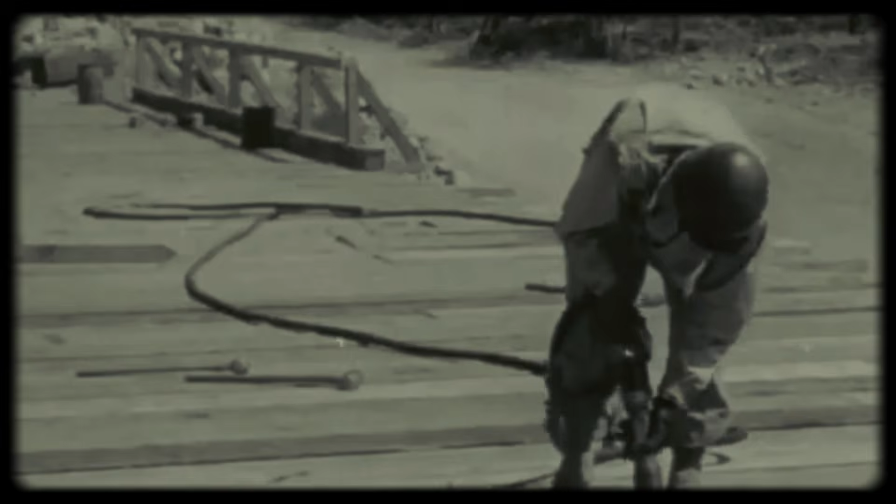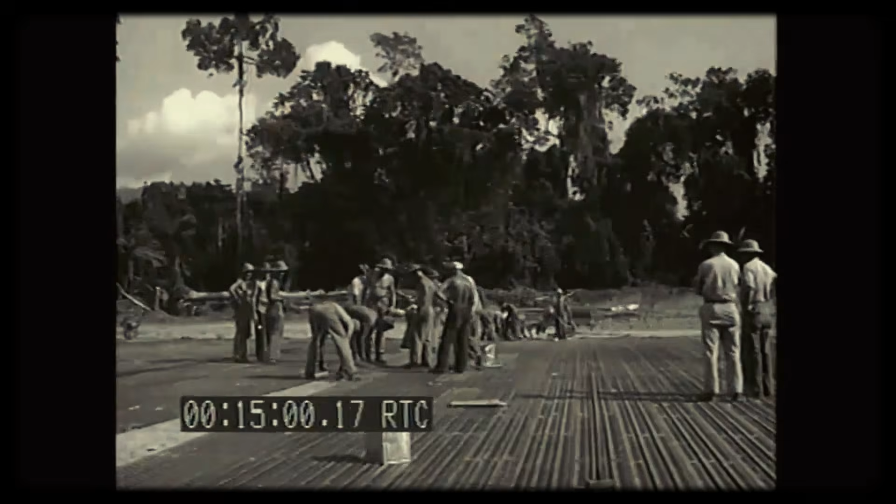Pacific Theater, 1944. American forces need airfields fast. Engineers are racing to build runways on islands that didn't have roads 6 months ago. Coral, volcanic rock, mud. Brutal conditions. The problem isn't just the terrain, it's time. Japanese forces can see what you're building. Every day an airstrip stays unfinished is another day bombers can't launch, fighters can't refuel, transport planes can't land.

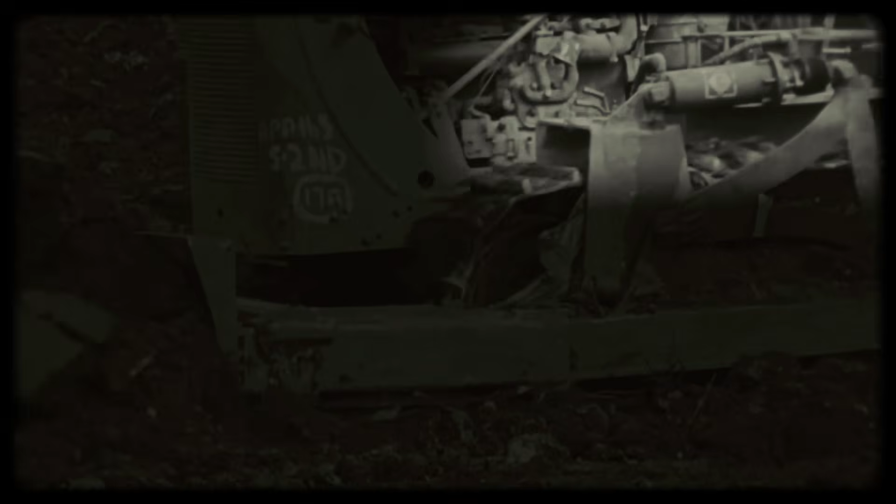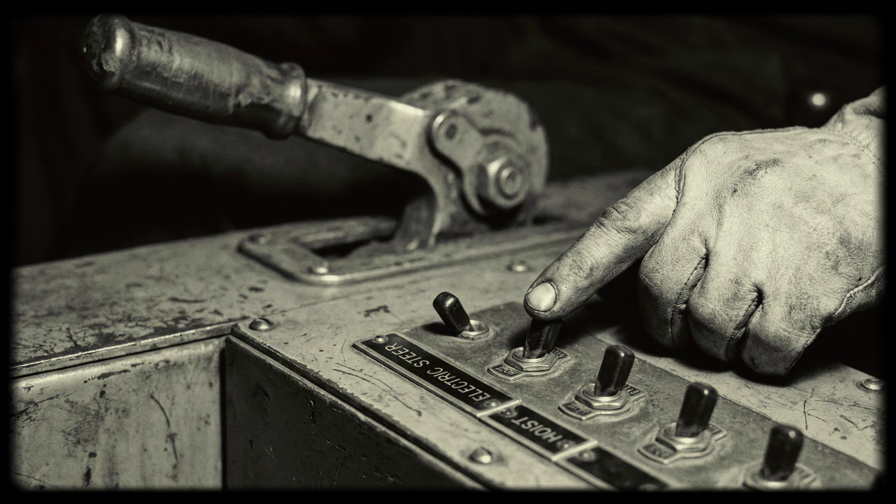Traditional earth-moving equipment is slow. Scrapers require constant gear shifting. Clutches burn out. Drive shafts snap. Operators need physical strength just to wrestle the heavy control levers. And then LeTourneau's machines arrive. Electric controls. No clutches, no transmissions, just fingertip switches that move 20 tons of steel and dirt like it's nothing. The Seabees and Army engineers watch these machines work and realize something: this changes everything.

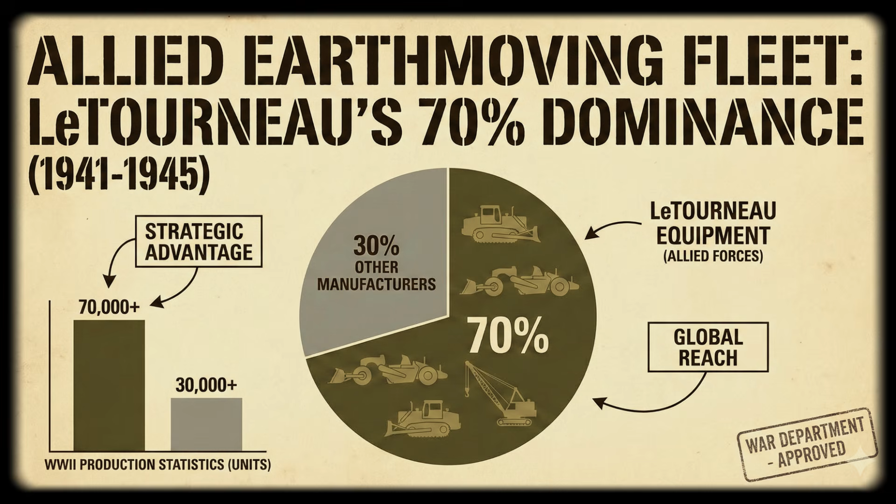Back in the States, construction industry engineers are still calling electric systems too delicate for real work, too complex, too vulnerable to the mud and vibration of earth moving. But in the Pacific, LeTourneau's equipment is building airstrips faster than anyone thought possible. And by the time the war ends, LeTourneau factories have supplied nearly 70% of the heavy earth-moving equipment the Allied forces used. The industry that said electric would never work in dirt just watched it win a war.

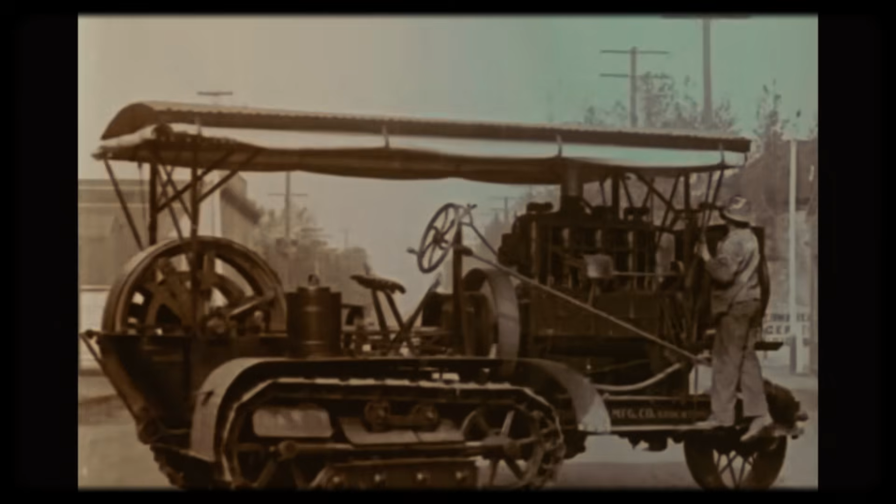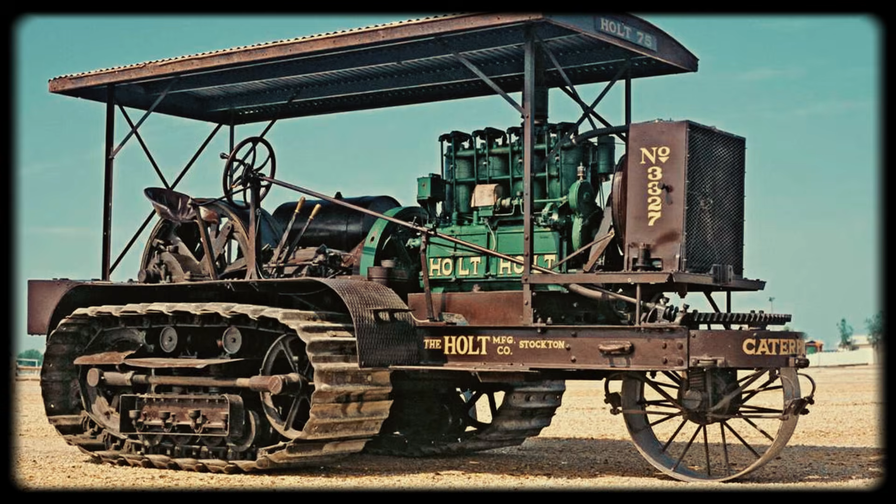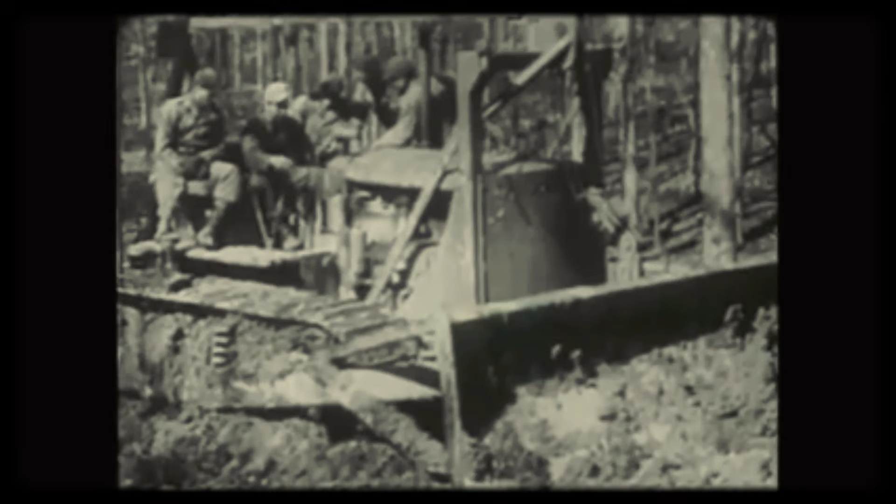Alright, let's get back to how one man changed earth moving. Robert Gilmore LeTourneau was born in Vermont in 1888, dropped out of school in 7th grade, worked odd jobs, leveler in an iron foundry, auto mechanic, farm laborer. In 1919, working in Stockton, California, he bought a used Holt tractor and a homemade scraper. The scraper broke almost immediately. LeTourneau fixed it, then started thinking about how to make it better. That broken scraper changed his life.

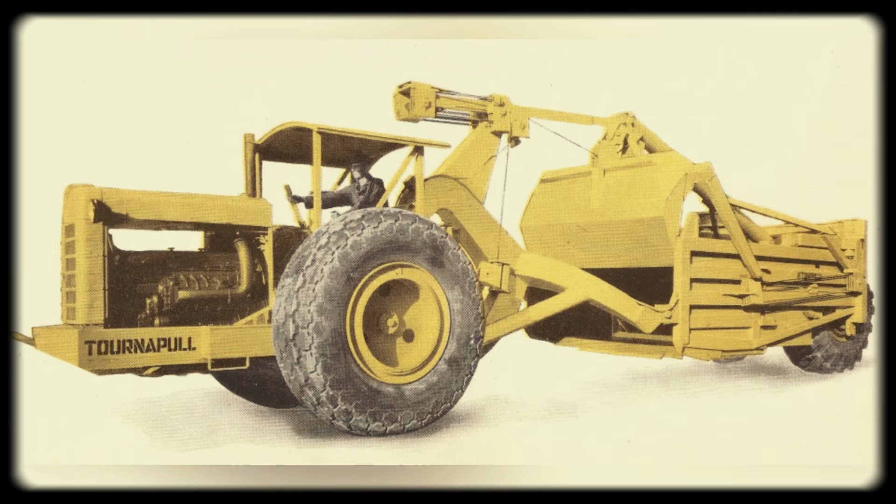He became obsessed with moving dirt. Not just moving it, but moving it faster and more efficiently than anyone else. He started designing his own scrapers, his own tractors, his own everything. By 1929, he'd founded R.G. Letourneau, Inc. Over the next decade, the company revolutionized earth-moving equipment. Rubber-tired scrapers, the Tournapull, a two-wheeled tractor that could pull massive loads. Innovations that made construction faster and cheaper.

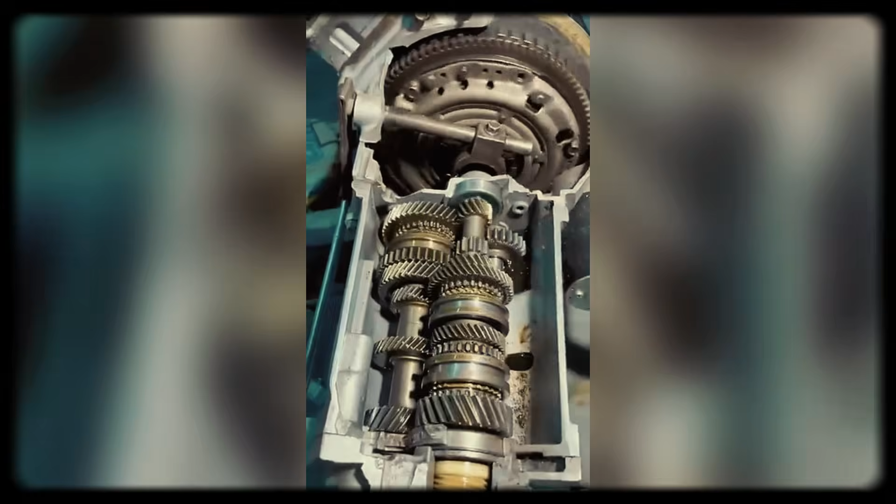But Letourneau kept running into the same problem: mechanical drivetrains. Traditional scrapers used diesel engines that powered wheels through clutches, transmissions, drive shafts, and final drives. Lots of moving parts, lots of friction, lots of things that could break. Operators had to physically wrestle heavy control levers. Shifting gears under load burned out clutches constantly. Drive shafts would snap, final drives would fail.

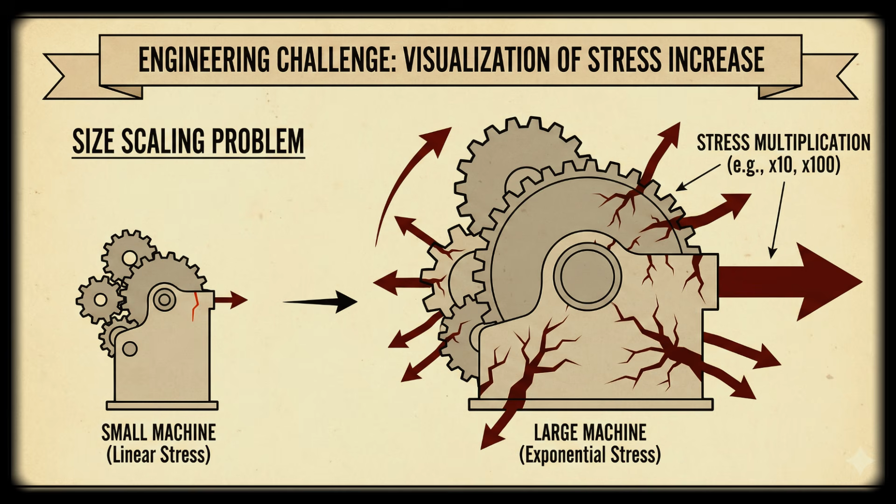And here's the thing about mechanical systems: they don't scale well. The bigger the machine, the more stress on every component. You couldn't just make everything 30% larger and expect it to work. Letourneau started thinking about electricity. The idea wasn't new. Electric motors had been used in industrial settings for decades. Factories, ships, locomotives, all used electric drive systems.

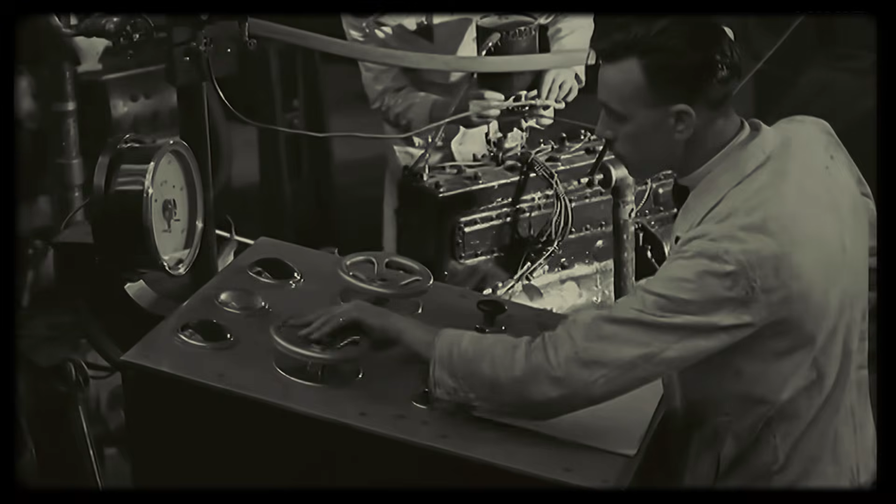But construction? Nobody thought electricity could survive the brutal conditions of earth moving. Mud, dust, vibration, temperature extremes, mechanical shocks from hitting rocks and stumbling through rough terrain. Industry engineers looked at electric systems and said, too delicate, too complex, too many things that could go wrong. Letourneau disagreed. He saw advantages nobody else seemed to notice.

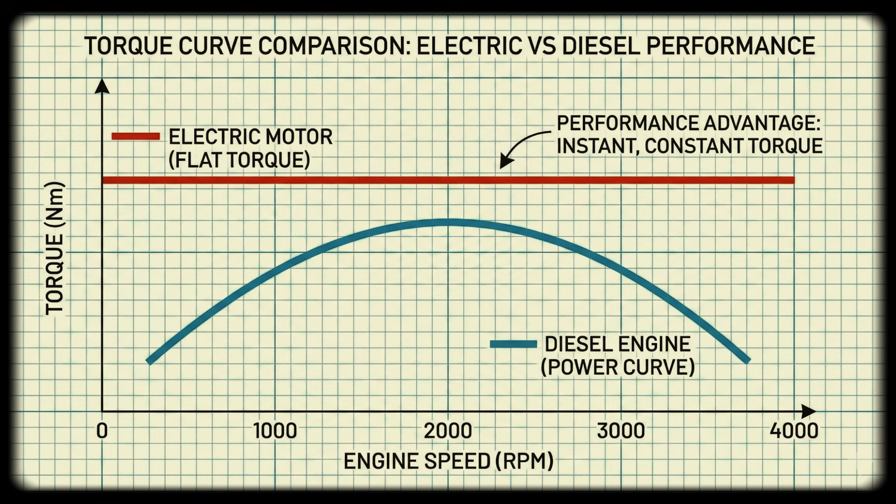Electric motors deliver constant torque across their entire speed range. Diesel engines have power curves. They're weak at low RPMs, strong in the middle, weak again at the top. Electric motors just pull, consistently, from 0 to maximum speed. Electric systems are also modular. If a motor fails, you swap it out. With mechanical drivetrains, failures cascade. A broken clutch can damage the transmission. A damaged transmission can destroy the final drive.

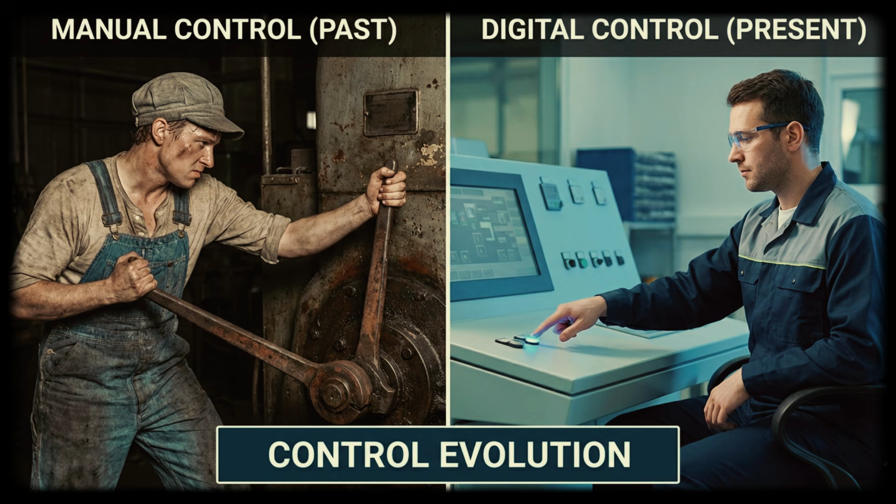And most importantly, electric controls are precise. Instead of fighting heavy levers, operators could use fingertip switches. Instant response, individual wheel control. The question was whether electric systems could handle the abuse.

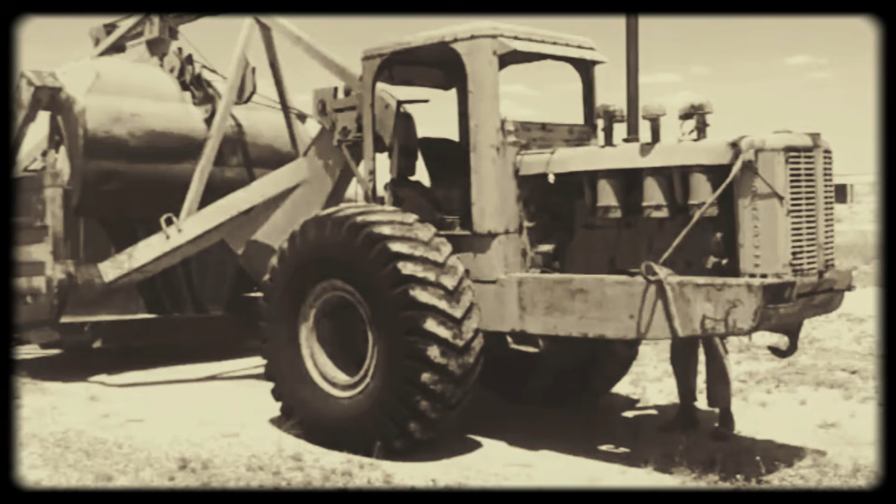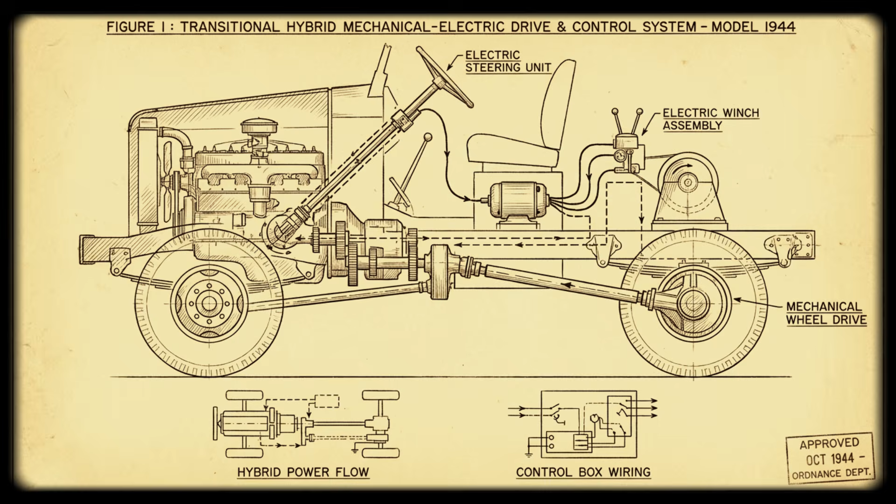In 1944, Letourneau introduced something that changed the industry's mind: electric controls on his Tournapull prime movers. Not full electric drive yet. The wheels were still mechanically driven, but the steering and the scraper winches, electric motors and controls. This was the breakthrough nobody expected. The military was desperate for faster construction. Building airfields in the Pacific required moving massive amounts of material under impossible conditions, often under fire.

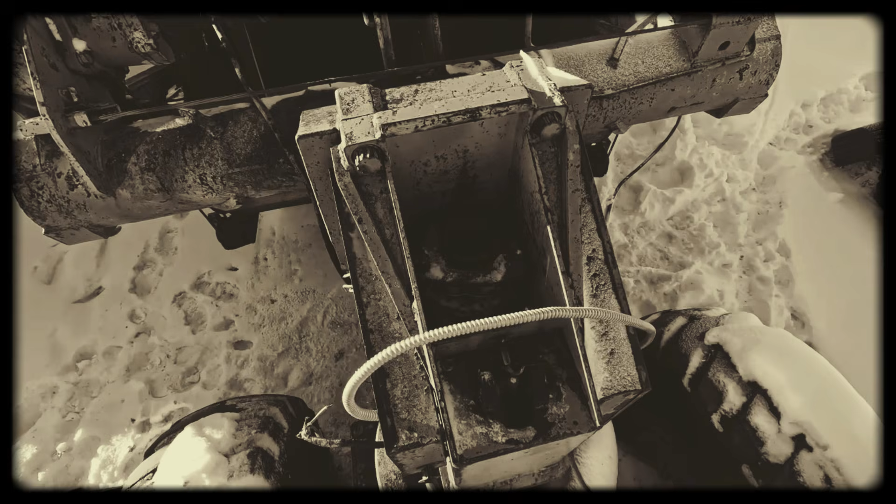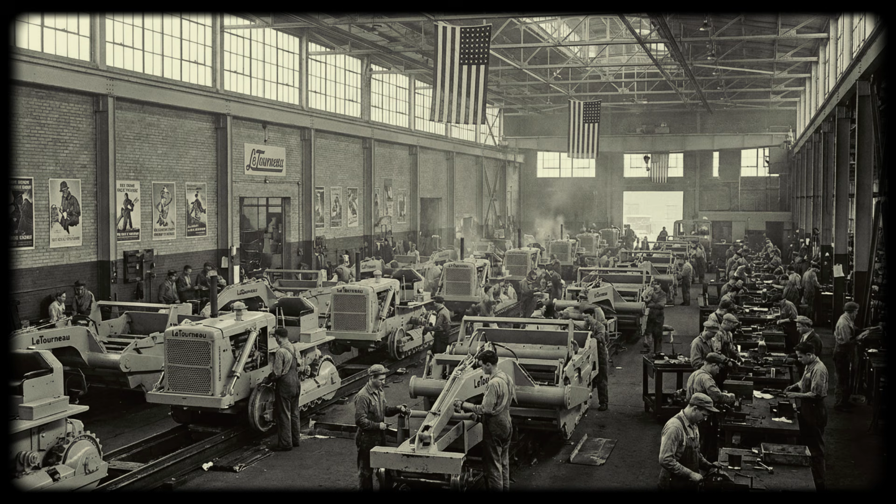Letourneau's electrically controlled scrapers were faster. Operators could control them more precisely. Maintenance was simpler because electric motors had fewer failure points than complex mechanical linkages. The Army and Seabees started ordering them by the hundreds, then by the thousands.

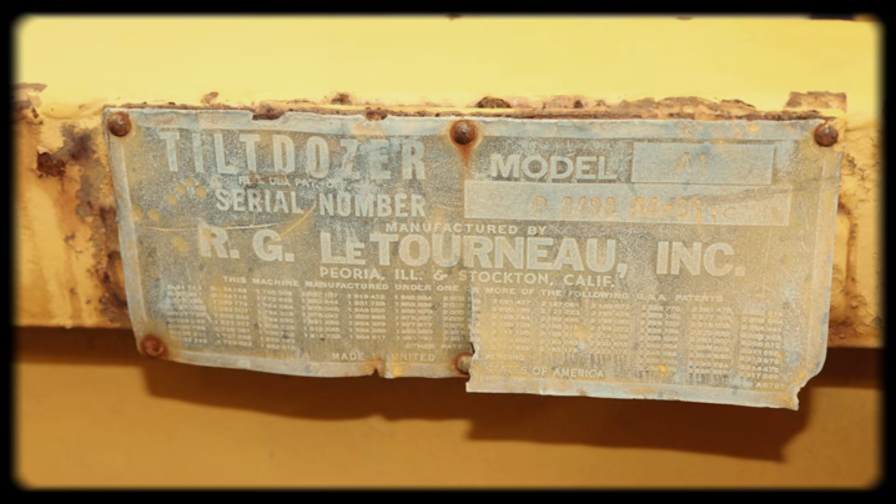By the end of the war, Letourneau factories had produced approximately 14,000 bulldozer blades, 8,000 scrapers, and thousands of other units, sheep's foot rollers, cranes, specialized equipment. Almost 70% of the heavy earth-moving equipment the Allied forces used came from Letourneau, and all of it proved that electricity could survive in dirt.

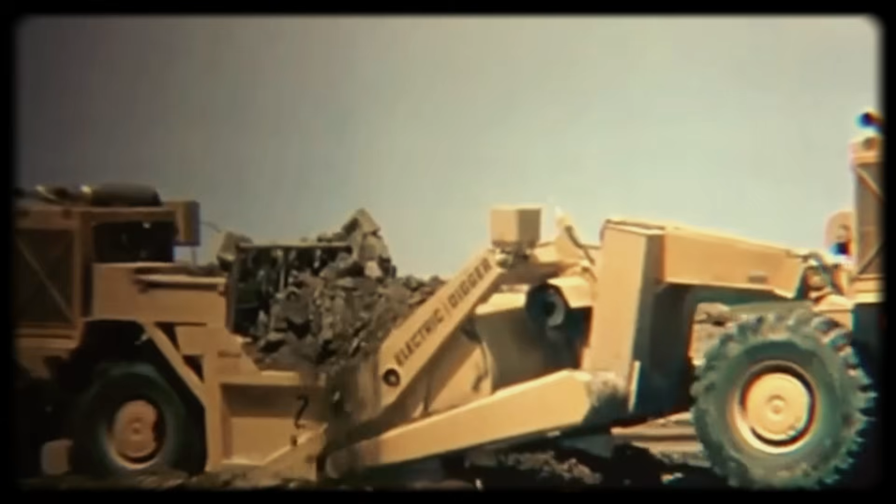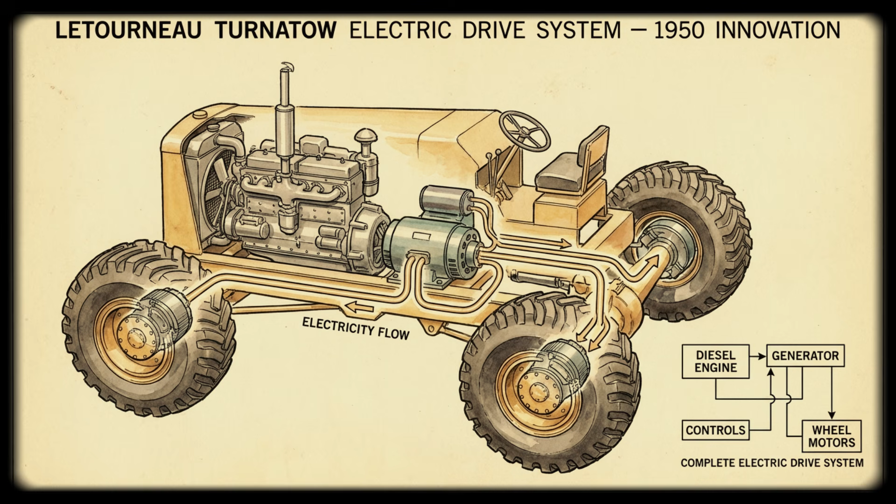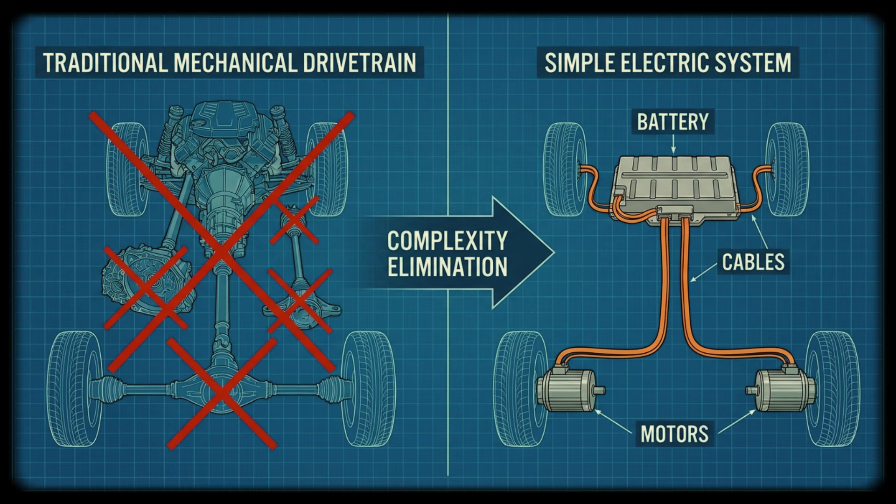After the war, Letourneau went further. In 1950, he unveiled the electric wheel. This wasn't just electric controls, this was full electric drive. The diesel engine didn't power the wheels mechanically at all. It drove a generator. The generator produced electricity. Electric motors mounted directly in each wheel hub provided traction. No clutches, no transmission, no drive shafts, no final drives. Just electricity flowing through cables to motors in the wheels.

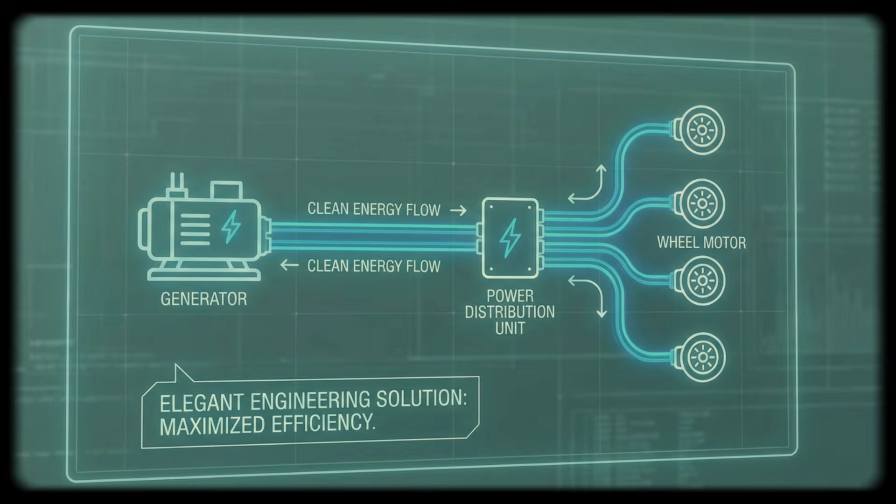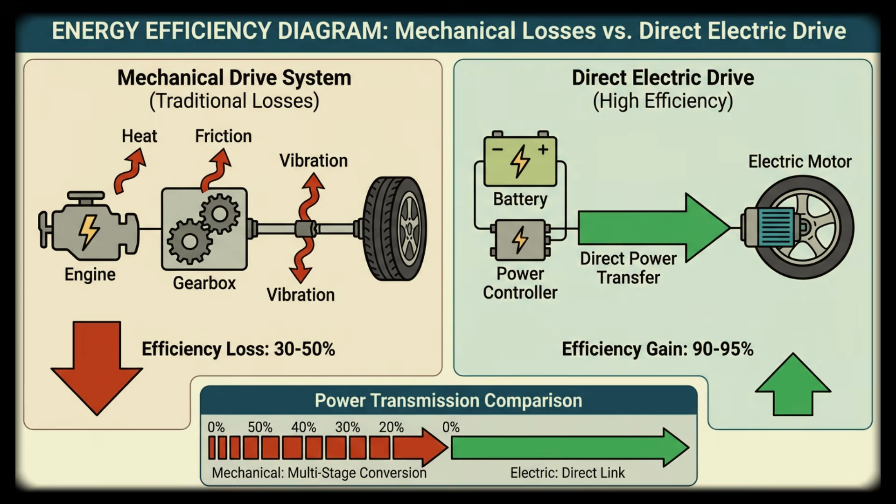The engineering was elegant. Instead of a central drivetrain losing energy through friction and mechanical complexity, power went directly where it was needed. The advantages were immediate. First, operator skill requirements dropped. You didn't need physical strength to control a machine anymore. Fingertip switches replaced heavy levers. This lowered the barrier to entry and made operators more productive because they weren't exhausted from wrestling controls.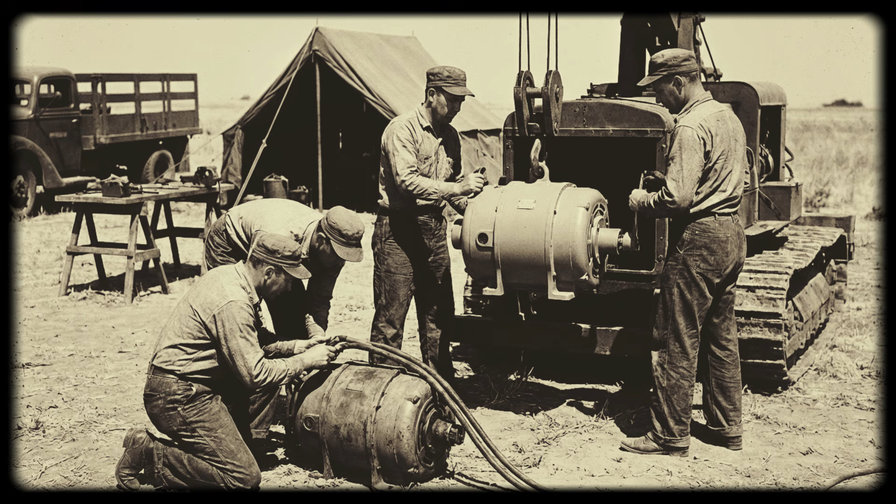Second, maintenance got simpler. Mechanical drivetrains had clutches that burned out, transmissions that needed constant service, drive shafts that snapped. Electric systems had fewer moving parts. Motors could be swapped like modules. Downtime decreased. But here's what's interesting about technology adoption. It's not enough to be right. You have to prove it under conditions where failure is unacceptable.

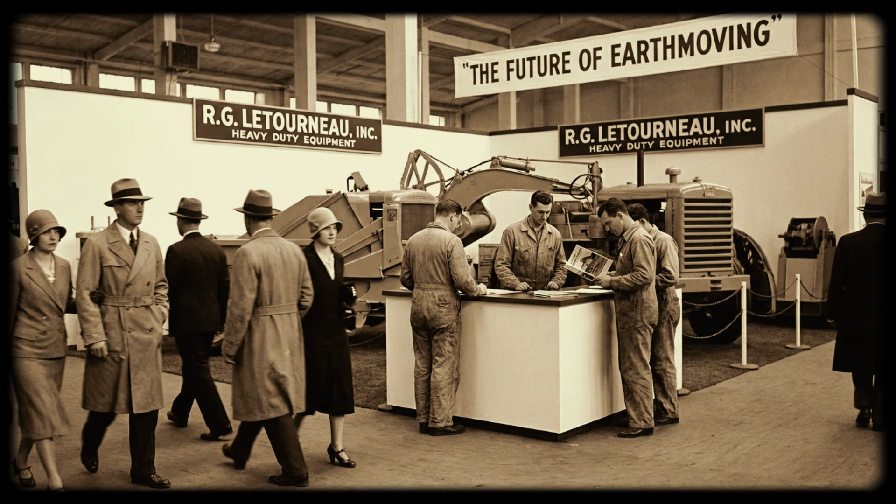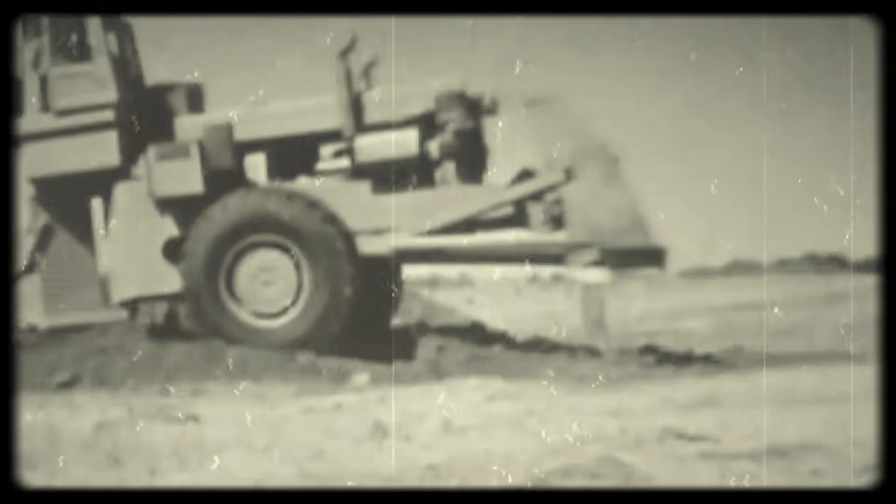Letourneau couldn't convince the construction industry through demonstrations or white papers. The industry was too conservative. Too many engineers had seen innovative ideas fail in the field. What Letourneau needed was a testing ground where electric systems would either prove themselves or fail spectacularly under the worst possible conditions. World War II gave him that testing ground.

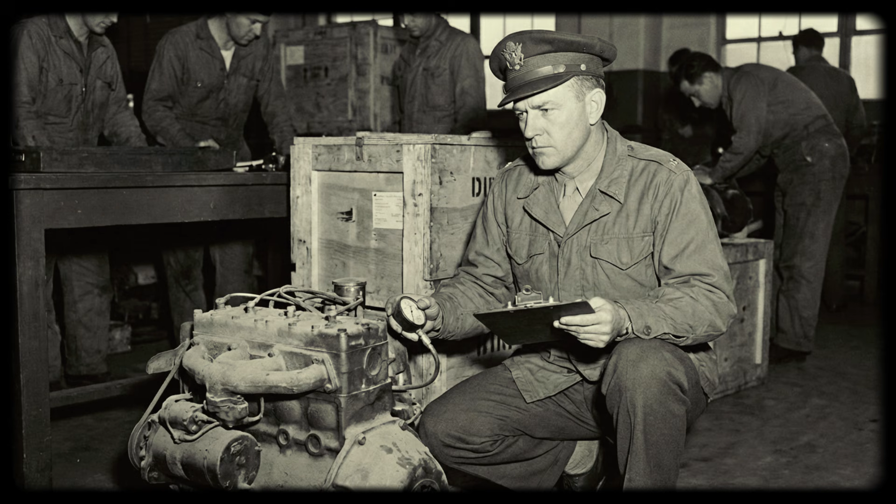The military didn't care about industry conventions. They cared about results. Can you build an airfield fast enough to save lives? Can your equipment survive combat conditions? Can inexperienced operators use it effectively? Letourneau's electric-controlled equipment answered yes to all three questions, and once the military validated it, the construction industry couldn't ignore it anymore.

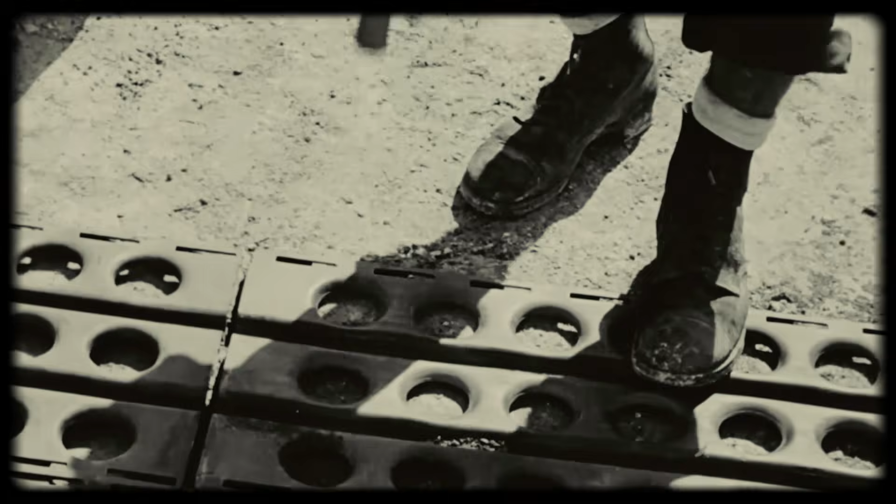This is the pattern that appears again and again with disruptive technology. Established industries resist change because change is risky. But extreme environments, war, disaster, desperate economic need, break that resistance. The military's adoption of Letourneau's equipment didn't just prove electric systems worked. It created thousands of operators who'd use them, maintenance crews who'd service them, engineers who'd seen them outperform mechanical equipment. After the war, those people went back to civilian construction, and they demanded the equipment they knew worked.

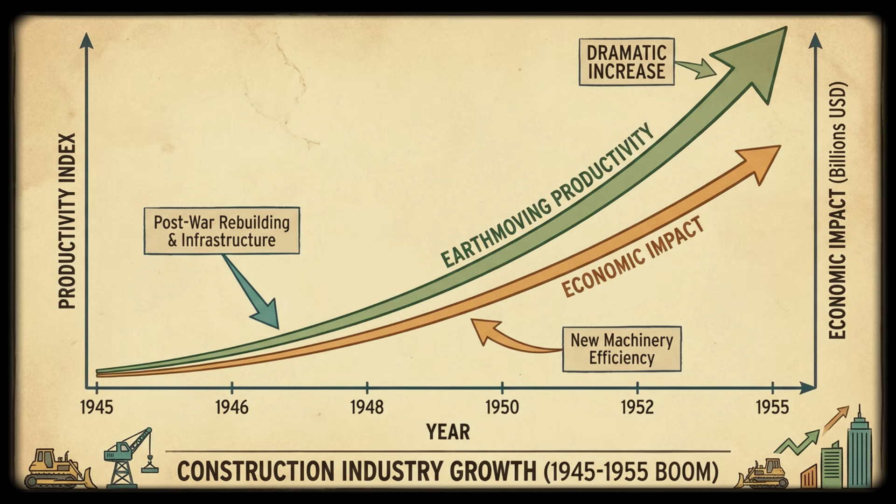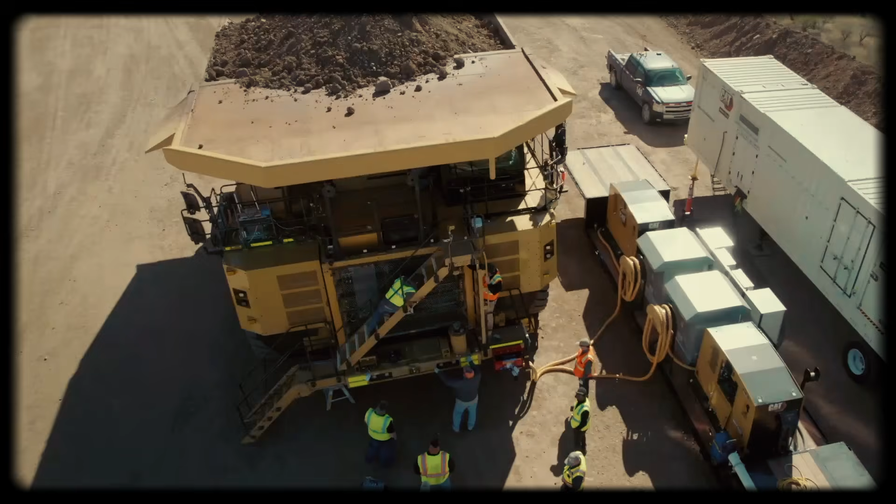The economic consequences were massive. Before electric drive, earth-moving operations were limited by operator fatigue, maintenance downtime, and the practical size limits of mechanical systems. After electric drive, operations could scale up. Bigger machines, longer shifts, less downtime, higher productivity. This directly enabled the post-war construction boom, the interstate highway system, massive dam projects, open-pit mining operations that would have been impossible with mechanical equipment. Modern mining trucks, the ones that carry 400 tons of ore, use diesel-electric drive, direct descendants of Letourneau's innovation.

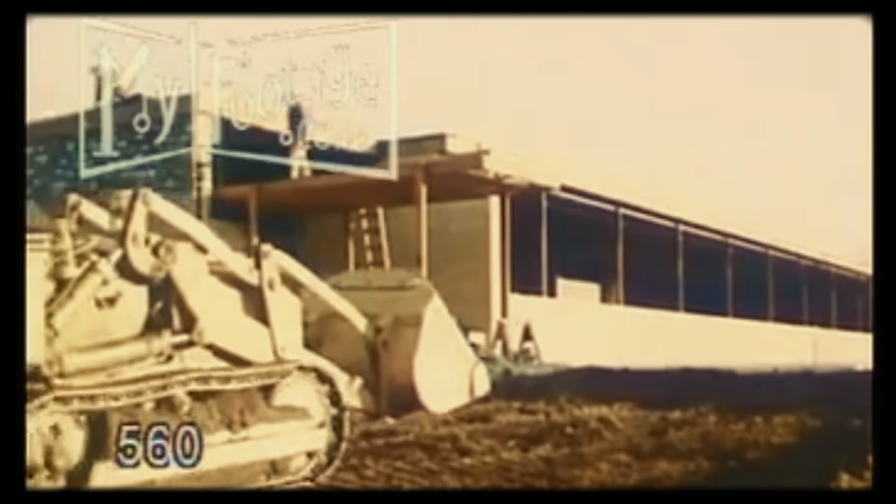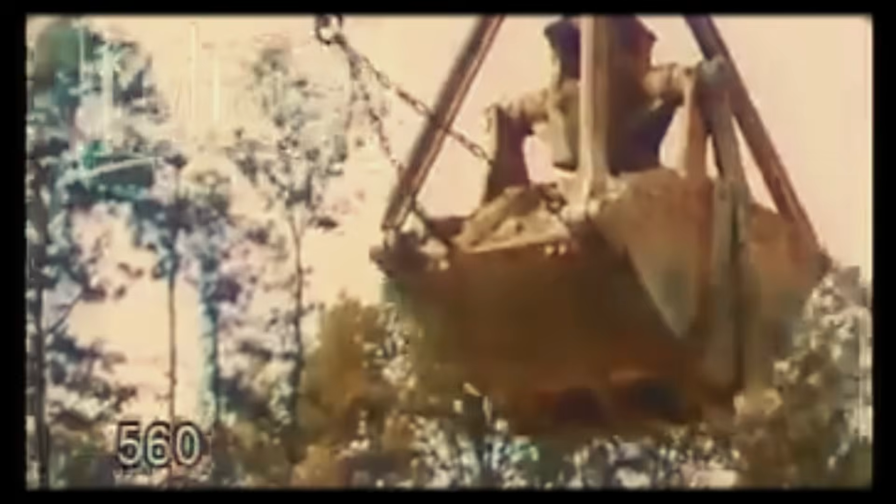The labor dynamics shifted too. Operating heavy equipment became less physically demanding. This opened the field to more people and changed how companies trained operators. Maintenance crews needed different skills: less mechanical repair, more electrical troubleshooting. The workforce evolved with the technology.

Letourneau himself kept innovating. He sold his company to Westinghouse in 1953 for $31 million, then retired to Texas. Retirement lasted about 6 months. At 70, he started a new company focusing on even larger machines. His motto captured his entire philosophy: "Your job's not too big, your machines are too small."

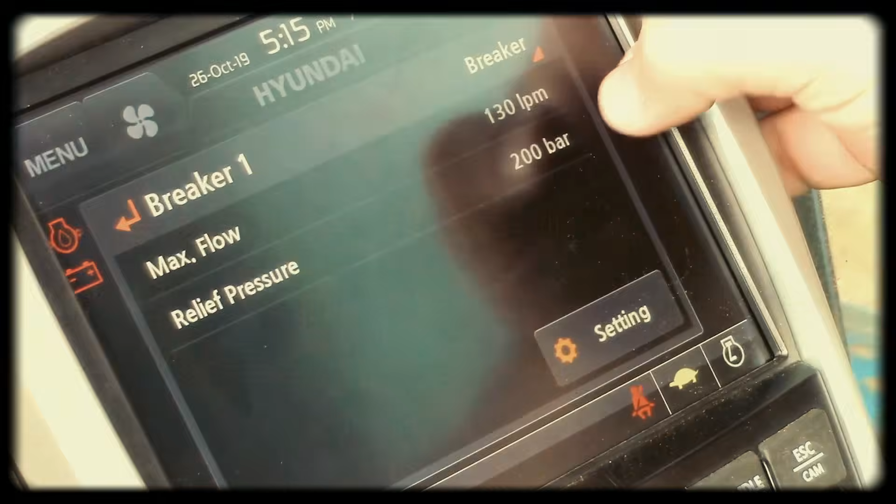He died in 1969, but his legacy is everywhere. Every diesel-electric mining truck, every piece of heavy equipment with electric controls, every modern scraper that can move dirt faster than anyone thought possible in 1944. The technology Letourneau pioneered didn't just change how we move Earth, it changed what's economically possible to build.